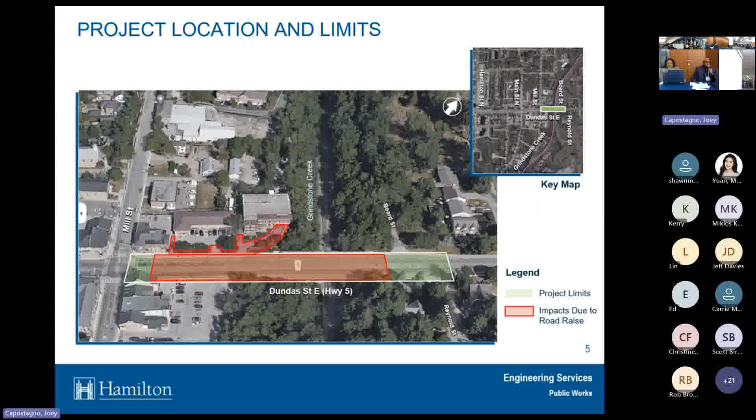Project overview: the Grindstone Creek Bridge is aging and showing signs of deterioration according to condition assessment, making it a priority for immediate replacement for safety reasons. The construction of the new bridge will enhance safety and mobility for all road users while incorporating modern design standards to ensure long-term durability for the next 100 years, supported by inspections and routine maintenance.

This project represents a city investment in the community, upgrading both the bridge structure and municipal infrastructure, including improvements to the sanitary gravity sewer and water main. The water main upgrade will enhance the service level for customers and improve operational flexibility within the pressure district, while the gravity sanitary sewer upgrade will eliminate the bottleneck at the bridge and ensure consistent service delivery.

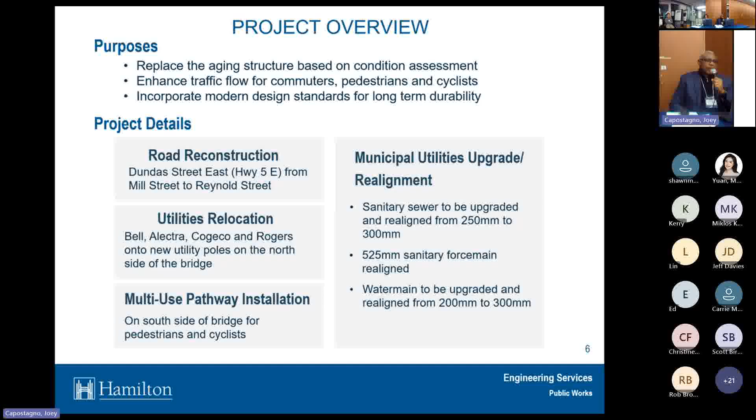The key design features of the Grindstone Creek Bridge: we have designed this bridge with both function and aesthetics in mind. The new bridge is a single span structure designed for all road users, both now and in future, featuring pedestrian-friendly walkways, multi-use paths, wider lanes, and an enhanced aesthetic design that blends the bridge seamlessly with the surrounding environment.

The design incorporates an element of Hamilton's history, from the 1903 bridge balustrade in the new end walls of the bridge, located at the four corners.

The total cost of this project, including all advanced work such as third-party utility relocation, contractor bid cost, consultant's fee, and Canadian Pacific Kansas City Railway flag person cost and contingency, is approximately 15 million.

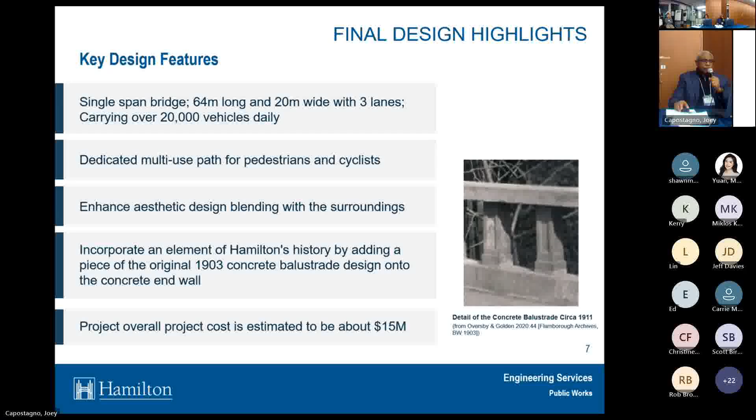Final design plans. Looking at Grindstone Creek Bridge from the treetop level, it features 3 widened lanes, 1 lane in each direction and a center turn lane, and is designed to serve all road users, both now and in future. The bridge also includes widened sidewalk and a protected multi-use path separated from traffic by concrete barrier and enhanced with traffic safety features.

Dundas Street will be reconstructed at a new elevation from east of Mill Street to Reynold Street. This will include grading private entrances and driveways to align with the new elevation. The municipal infrastructure, including the 525 force main, 300 millimeter gravity sewer, and the 300 water main, will be suspended beneath the bridge. It is not shown on the drawing now for clarity.

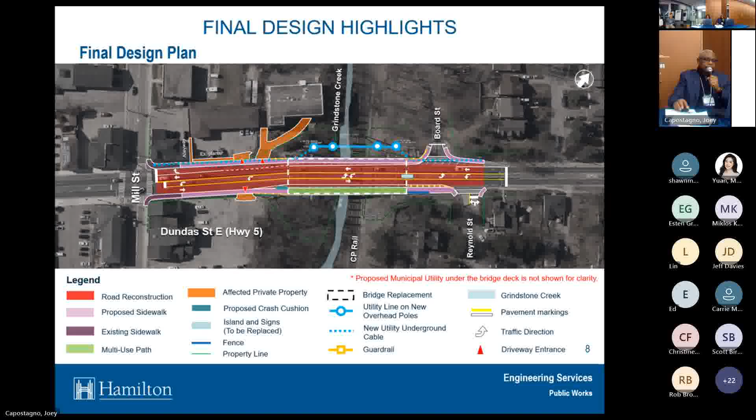This is the cross section of the Grindstone Creek Bridge facing Burlington, showing a composite structure with concrete deck supported by steel girders. The new bridge is slightly smaller than the existing one. The sanitary force main and the sanitary gravity sewer on the right-hand side will be

relocated on the south side of the bridge and constructed in phase 1, which is this year, 2025. The 300mm water main will be completed in phase 2, 2026.

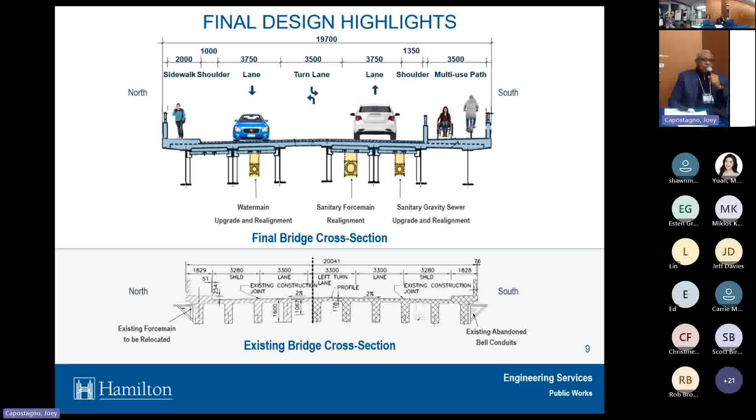This is the 3D model of the completed bridge facing Burlington, with insert highlighting the location of the heritage feature. We can see all we noted before: the guardrail, the barrier wall, the location of the sidewalk, the crash cushion attached to the barrier separating the multi-use path from traffic, and the multi-use path itself on the south side.

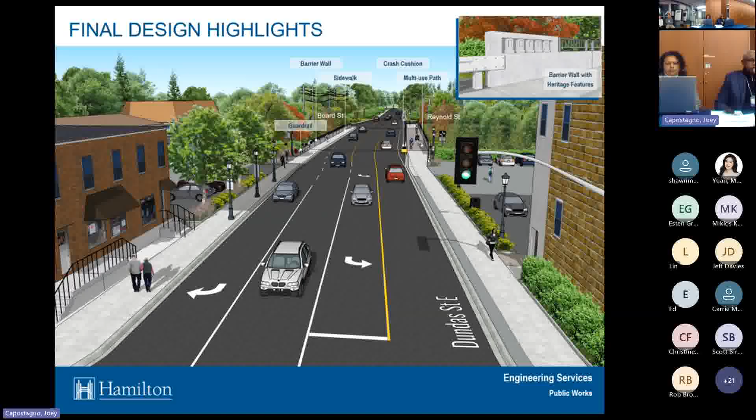Construction phasing and schedule. The Grindstone Creek Bridge project is being managed with a phased construction approach that spans 2 construction seasons, 2025 and 2026. This strategy ensures the project progresses while maintaining services for all road users and keeping the community connected.

Stage 1 will begin in spring and be completed in December 2025. Construction will take place on the south side, shown in red, while the north side will remain open to traffic as a single one-way lane for eastbound traffic towards Burlington.

Pedestrian accessibility will be maintained throughout construction. The sidewalk on the south side will be closed. Pedestrians will be rerouted to the north side sidewalk using a temporary pedestrian signal.

In stage 2, we will begin in spring and complete in fall 2026. Construction will take place on the north side, shown in red, while the reconstructed bridge on the south side will open with 2 lanes, 1 in each direction. The sidewalk on the north side will be closed and pedestrians will be rerouted to the south sidewalk using a temporary pedestrian signal.

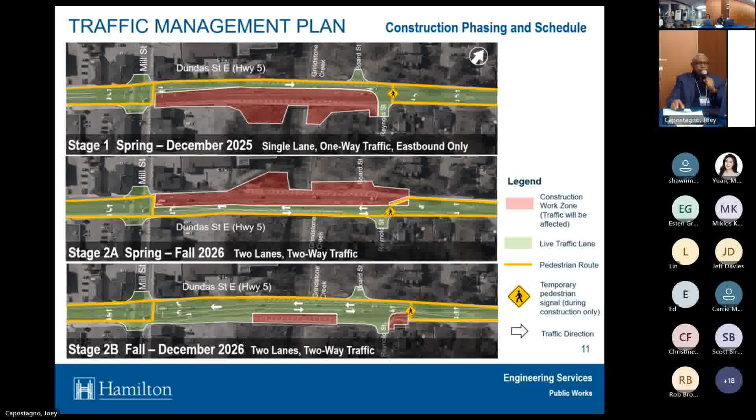The temporary detour plan. The designated temporary detour route for the Grindstone Creek Bridge replacement will run from Burnside Boulevard through Parkside Drive and Hamilton Street North. Clear signs will be installed in advance of the detour route to guide drivers, with detailed signs on Dundas Street indicating side road closures and local traffic only.

Additionally, traffic control measures, including temporary traffic signals at key intersections such as Parkside Drive and Robson, and Parkside Drive and Baldwin, will be implemented to improve traffic flow and support the community during the detour.

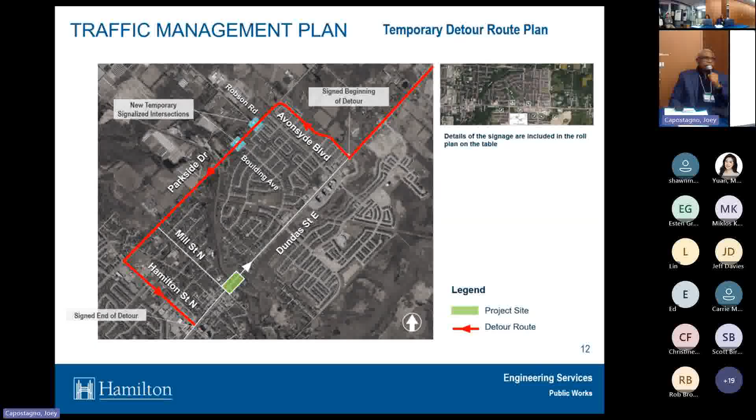We will begin by outlining the challenges and community impacts, followed by our plans to address them throughout construction. The first is traffic congestion. We know there will be increased delays during peak hours and other times, impacting commuter travel and delivery schedules during construction.

There will be short-term full road closures during construction of specific sections or processes in the bridge construction, such as during installation of girders and reconnection of municipal facilities.

For transit, only myRide On-Demand services will be impacted.

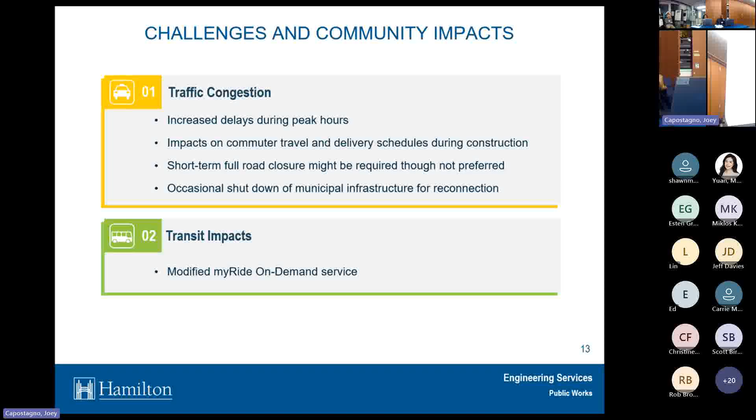The third challenge we have identified is accessibility to businesses. There will be limited access to some businesses near the construction zone, and impacts to some driveways and alleyways during road construction.

For pedestrians and cyclists, we have limited or rerouted pathways, creating challenges for active transportation.

The environmental concerns we have identified include limited impacts on trees and the creek, noise, dust, and potential vibration impacts on sensitive buildings.

These mitigation plans are aimed at minimizing disruptions and safeguarding the well-being of residents and businesses during the construction process. For traffic congestion, we have phased the lane closures to reduce disruption to the community.

There will be occasional nighttime and weekend work to accelerate the schedule and reduce overall impacts and municipal infrastructure disruptions to the community. We will clearly identify the detour routes and sign them properly for driver assistance. Traffic signal adjustments and temporary signals will be installed for smooth movement.

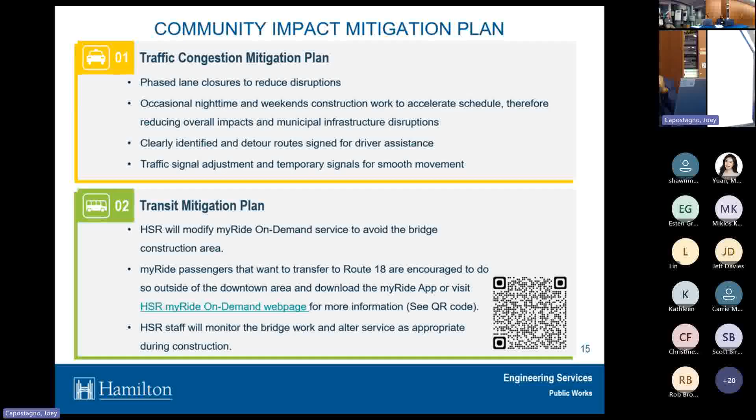HSR, which is Hamilton Street Railway, staff will continue to monitor the bridge work and alter their service as appropriate during construction.

Accessibility to business: access to business and residents will be maintained during construction. On the north side, the sidewalk construction will be phased to mitigate inconveniences to access local business near construction sites.

Private driveways and alleyway entrances affected by construction will be repaired by the City of Hamilton, and all repair costs are included in the contract.

Pedestrian and cyclist accessibility: alternating sidewalk closures on the north and south side of the bridge will maintain pedestrian accessibility, with pedestrians rerouted to the opposite sidewalk using a temporary signal.

Environmental impact mitigation: we will install construction barriers to safely separate work zones from traffic and surroundings. We will limit tree removal to only essential areas, with a commitment to replanting native species to support local biodiversity, and protect the creek using erosion and sediment control measures.